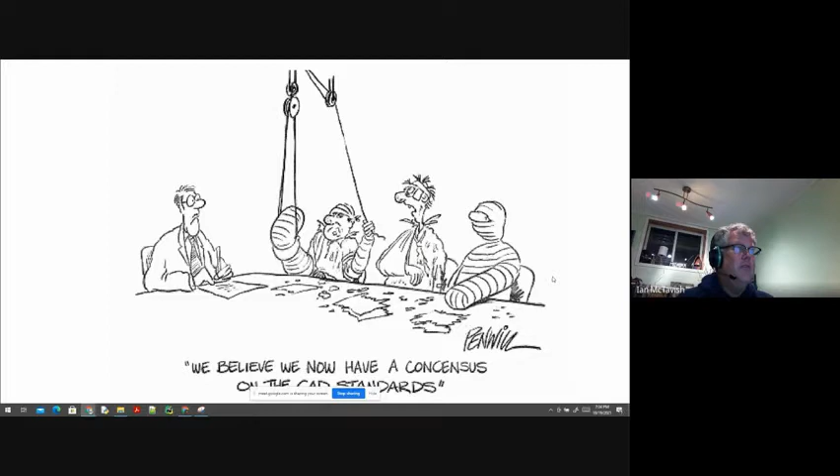And I just saw this joke and I just had to throw it in. We believe we now have a consensus on the CAD standards. Sam and I have had lots of debates over the years about what we should have, what we shouldn't have. And it's always evolving.

Now, drivetrain's the most important thing. Having said that, it's also in some ways the simplest thing. And the reason it's the simplest is because it's so important. I don't want to mess around with it. So, for example, we're trying to raise money to do a swerve robot. We are not going to do swerve in competition until we've built one outside of competition and practiced with it

and tested it. So once January 6th or January 8th comes along and we have our game, if we think swerve would be really great, if we haven't built one before then, we're not doing it. I want to make sure that our drivetrain is reliable. So weighted objective tables are really, really important.

And with the recording, if you go to your Google Calendar later on, this will all be saved there. So you'll be able to access the links and everything in the Google Calendar. So there's the weighted objectives table. I'm not going to read it, but basically you look at what criteria you have. So for me, cost, experience, reliability, maneuverability, and you weight those different things.

So even though swerve, for example, is very maneuverable, it comes at a very high cost. And once we do the calculations at the moment, it's not worth it to us. Now, if we get those swerve modules, if we raise the money to do that, and we build a test robot, well, we can use those same modules. Now the cost drops down. All of a sudden it becomes feasible.

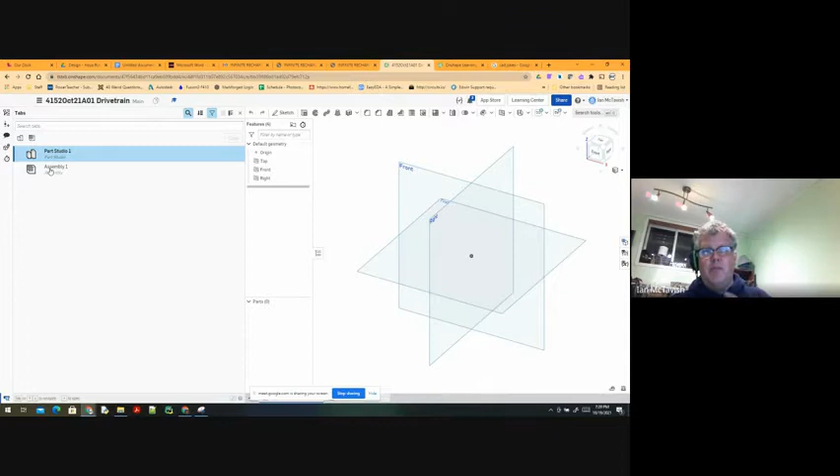And David's got a point. This naming convention can get really complicated. Our robot will have thousands of parts, and having this sequential system is really important for us. The other key thing is separating this into separate documents; we ran into a problem where it would just bog down because there was so much detail.

Separating the documents is new for us this year. Let's say David's working on the drivetrain, Avalon's working on an intake, Sophia is working on a climber, and all the different people are working on different parts. Because they're working in different documents, it's not bogging down the same way. So that's going to be a really key piece.

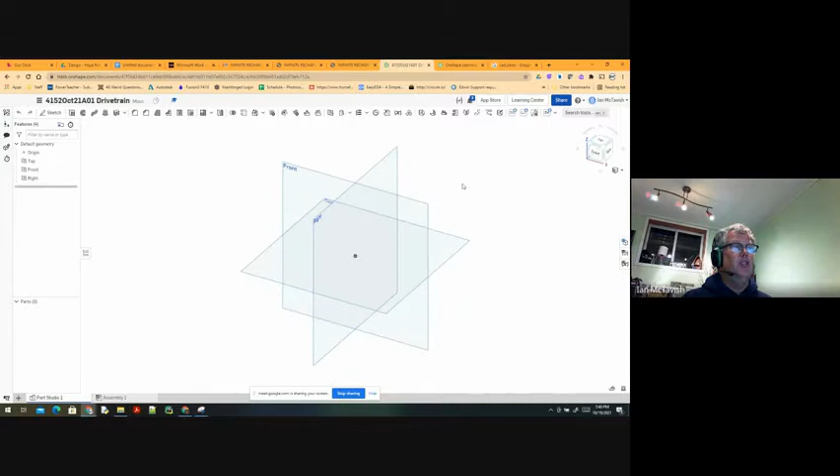The tab manager, I'm going to hide that so I can see my screen. There's my top view. If you're new, this little cube allows you to look at things in 3 dimensions. Your right mouse button rotates your camera, your scroll wheel pans the camera and zooms in and out, and your left selects. So top view, sketch. Whenever you go into a sketch, you type the letter N to normalize it. So here is my view.

I'm going to create a center point rectangle for the drivetrain. I click on the center, and the orange indicates that there's a constraint. This is the coincident constraint; hold your mouse over it and it tells you what it is. They share the same location, so the center of this rectangle is locked on the origin, which is what I want. I click and drag, making sure I'm not getting any orange, click over here, and now hands off the mouse, and I type.

My width was going to be 27, but I'm going to make a change. I'm going to type the number sign. This is new: when I type the number sign, I can create a variable right in here. I'm going to call this robot width and hit enter. Here I'm going to type 27. I'm going to stick to numbers instead of length.

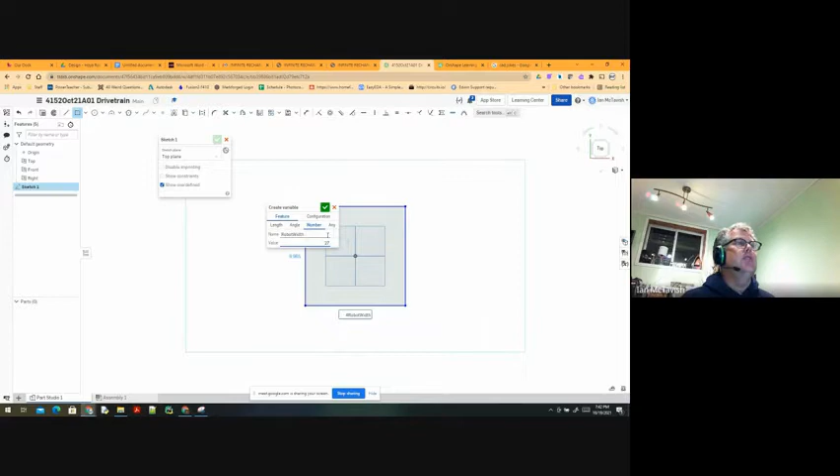The reason is that as I manipulate things, if it's a number, I can do math with it, and if it's a length, I can't. So that's going to be 27. Click the green check mark, click enter. There's 27. Whoops, I don't know what happened there. I'm going to hit escape and click my dimension tool. Click, click, and again, I can create a variable right in here. This is going to be my robot length, and this was 32.

And enter. Now that's the perimeter of my robot. So I'm just going to click the green check mark. I just want to explain a few things.

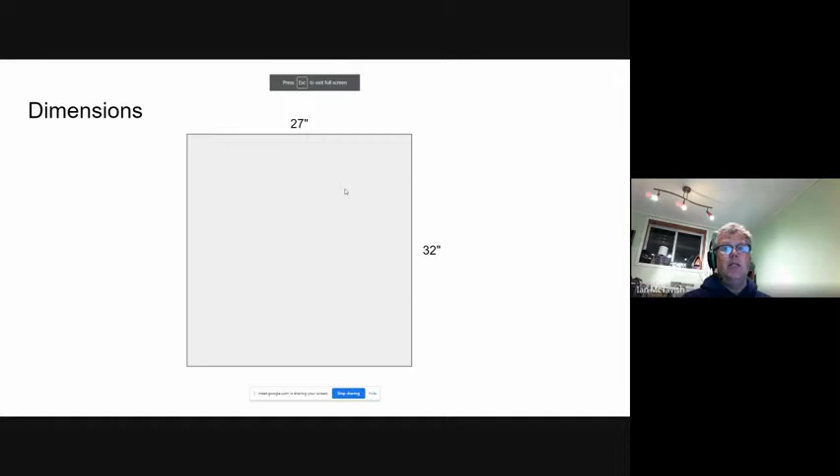The first thing is you can see my variables are right there, and this is a fairly new feature. Those of you that did Techno Girls, we may not have dealt with that back then because it wasn't part of OnShape. It's a really useful feature. I can click in here and type a different number, and everything is automatically adjusted based on the number that I have. So there we go, 27 by 32, that's the perimeter I'm going to use.

Now I'm going to quickly show how we get that. There's a couple key aspects. Aspect number one: read the manual. This is something you're going to hear from me over and over again. This is the link to the FIRST Robotics competition manual, at firstinspires.org.

That is the website for FIRST Robotics, and that is a website we use to find out the rules of the game. It's going to be really important that everybody is able to go to that website, find the manual, and read through it. There's the links for the manual, and there's a bunch of sections, but you can't quite see on that one. So let me just skip over to where I've got the page open.

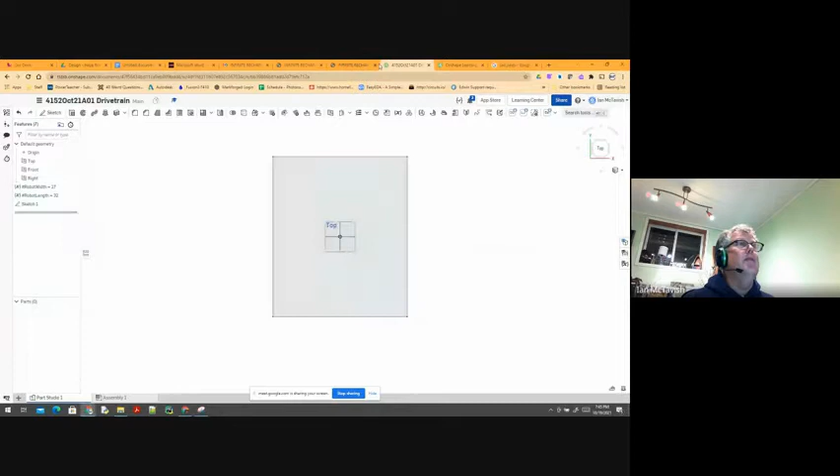Here's the manual, and you can see there's different sections. The section on robot construction is going to be crucial for the design team to know about. In the robot construction section, here's rule R3: your perimeter cannot be greater than 120 inches. So our robot is 27 inches by 32 inches. If you do the math, it's going to be under 120. And it can be no more than 45 inches tall, and we can't extend beyond that.

So those were the rules for Infinite Recharge. The rules will be different each year, but typically what we've found in the past is that the kit of parts drivetrain is basically a 32-inch long side, and that seems to work really well. So we try to stick within that.

Having said that, I've made a 24-inch robot last spring and this fall. If things work well with this, then that might be something we'd look at if there was a game where we had to balance with other robots. Having a smaller robot would be a huge advantage because you could get more robots on.

So there's our sketch. Over here in the feature tree, it's really important - you can see all your different features, and you can double click to go back into the sketch. So I'm in the sketch, and that's my perimeter.

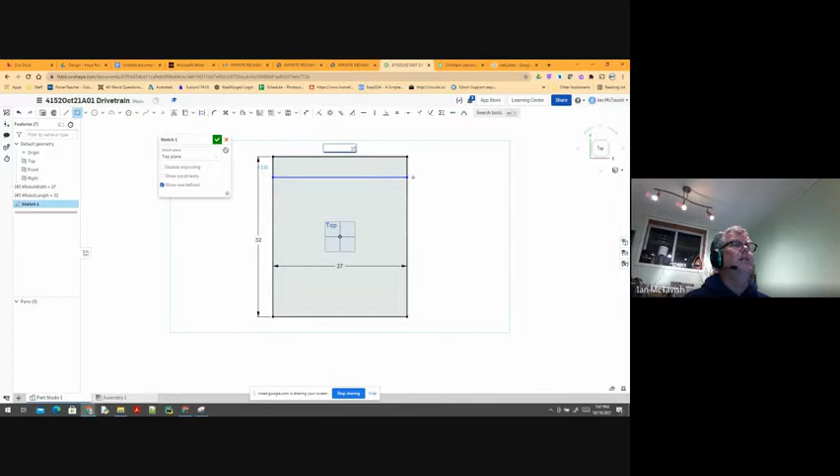Let me show you what I mean by that. If I set that as 27 inches, let me just do it again so you'll see what I mean. That orange indicates that it's going to have to touch that. Well, if I then set the width, this is over constrained, because it's saying this dot has to be touching here and this dot has to be touching here, and you're saying this has to be 27.

They're going, what if you change the width? Then it's not going to be true. And what do I pay attention to? That's why I don't want to set that distance - anything in red is bad. So what I want is the black line. Here's the blue line - it's not constrained. My dimension tool, and you'll notice that when I hold my mouse over a tool, there's the letter D.

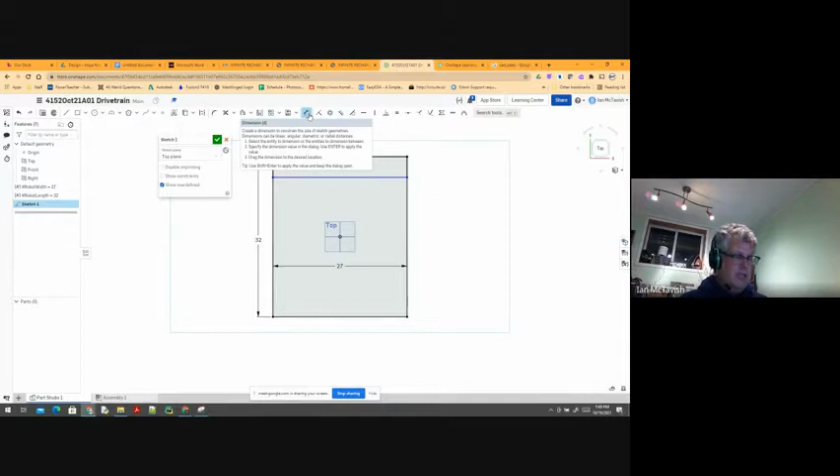Using keyboard shortcuts, the letter D turns the dimension tool on and off. Get comfortable with those because it'll make you faster. So I'm going to click that line and that line with my dimension tool, and I'm going to say this is going to be 1 inch. So we're using 1 inch by 2 inch tubing for this.

That's 1 inch. Then I want to have another one over here, and this is where I'm going to take advantage of the mirror tool. The mirror tool allows me to select this line right here that goes through the origin and select this line, and just like that, I've created another rectangle at the bottom by mirroring it.

And one more rectangle over here. So this is going to be my side rail. You'll notice that I've just put it in a little bit. I am going to make it 1 inch, but I'm going to escape. I don't want to set that height.

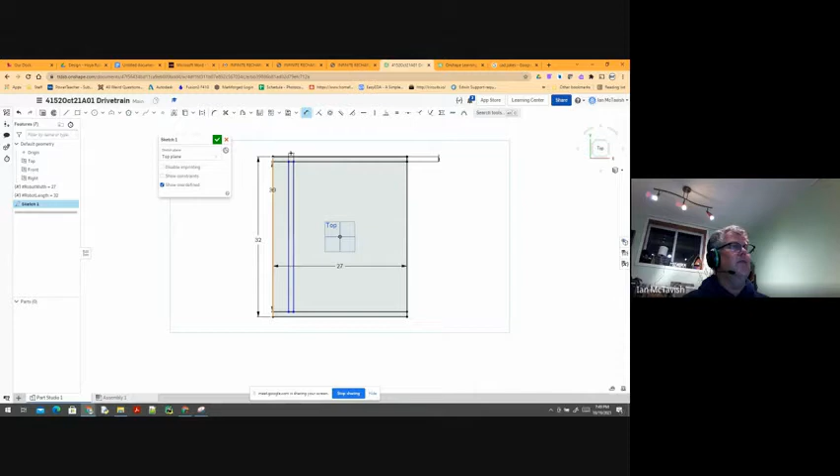Now, this particular one, what I need is my wheel depth, and I'm going to use a variable. So with my dimension tool, I'm going to click this line right here, and click this line right here, and click and type. By typing the number sign, I can create a variable. So what I'm going to call this, it's going to be a number, wheel depth, and it's going to be a value of 4.

Click OK. So the idea with the West Coast drive is my front will actually extend past my wheel, and I'll have my wheel in here on an axle. So that's all good. Again, I want to mirror it. I'm going to click the mirror tool, click that line, and now I can select those lines, and there's my frame perimeter. That's what it's going to look like.

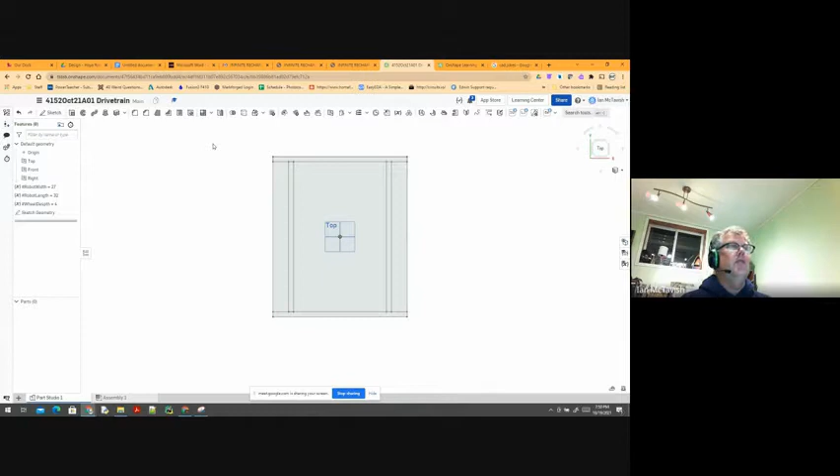So that's my sketch, and I like naming things because we're working as a team. Naming it sketch geometry makes sense for our sketch perimeter. It's a little easier for us to figure out what you're referring to. You'll notice that in here, you can actually add folders and organize the features. Sam does that. It makes it so much easier because we're going to have so much stuff.

Now, let's go back to the slideshow.

Wheels. So with wheels, we need to make some decisions about our wheels, and there's a whole bunch of different options. I am just going to share this link with you. Copy link address. This is a phenomenal resource that NASA and the Robotics Alliance project put together. It's a robotics design guide, and basically they go over everything, like why you would use a 4-inch wheel versus a 6-inch wheel. There's a lot of detail in this, and it's really worthwhile reading.

So there are some advantages and disadvantages. In infinite recharge, for example, there's a bump on the playing field, so the question is, we need to get over that bump. Right off the bat, that kind of eliminated 4-inch wheels for us, because a 4-inch wheel wouldn't get us over that bump. Now, some teams did use a 4-inch wheel, and what they did is they built a ramp so their wheel would slide up, but they had to put their wheels close together so it wouldn't get caught on the thing. So there's ways around it, but immediately a 6-inch wheel worked for us, so that's what we went with.

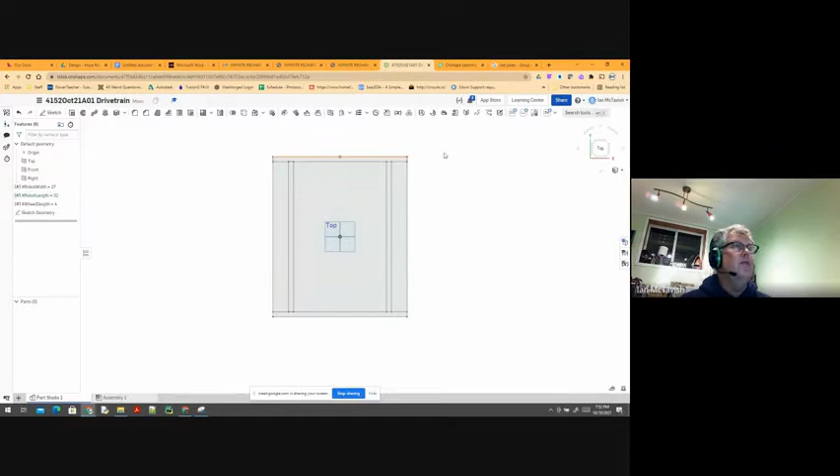So let's turn this into an actual shape. Over here, you can add custom features. If you can't find the custom features option, if you're looking on a smaller screen, the search tools is always at the end, and you can just type custom and there's add custom features.

So when you add custom features, these are some of the things that they're called feature scripts. The idea is that somebody has programmed a whole sequence of steps. Some of this stuff would take a long time, but by using this program, we can do it really quickly. So the one that I'm going to use is called Extrude Individual. So what you do is you just type Extrude Individual.

I'm going to copy that and put that in the chat, so if spelling is not your strong suit, there it is. When you hold your mouse over it, if there's a bunch of different ones, this is the one from Julia's feature script. So that's great.

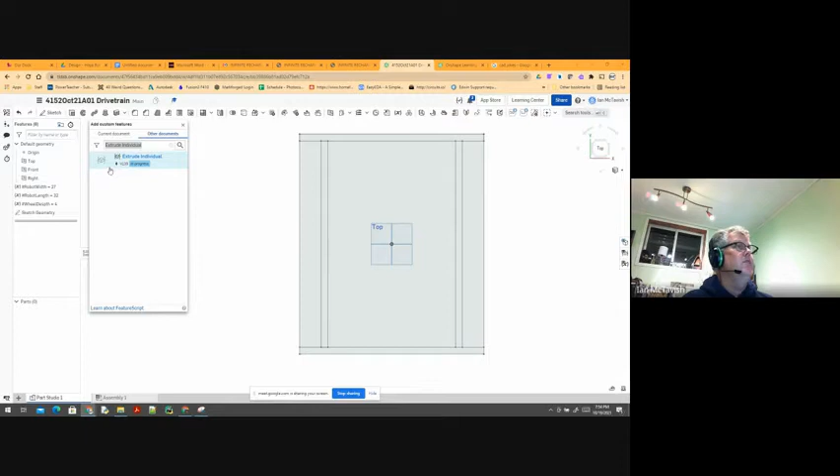That's what we're going to use. You would click on it. Now I'm not, because I've already got it. So these are all the custom features that I've added to my OnShape. There's Extrude Individual. I'm going to click on that right now. And what I can do is I can click on each of these rectangles.

And I'm going to set my depth to 2 inches. Extrude Individual, I call them rails, and green check mark.

And just like that, I have 4 different parts. You can see I can hide each of the individual parts down here, and I actually have some rectangles now. So that's kind of cool. Now, what I'm going to do is I'm just going to turn to the right.

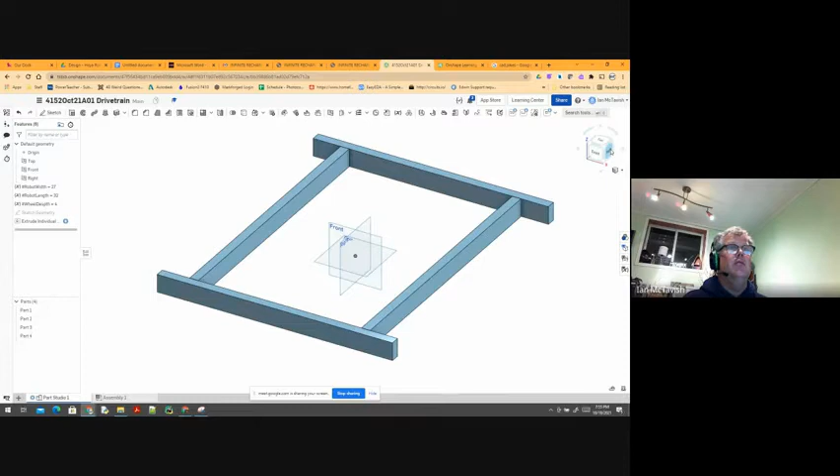And what I'm going to do is I'm going to click on the right plane and I'm going to create a sketch. And what we're going to do is we're going to set where the wheels go.

So the first thing is we're going to create a circle here, and we're going to create a construction circle. This is just going to show us where the wheels are, and I'll explain what we're doing in a moment. So I've got my circle tool, my construction tool, and now I'm going to hold my mouse over the origin, and you'll notice there's a little orange dotted line that indicates this is vertical to the origin. So that's great.

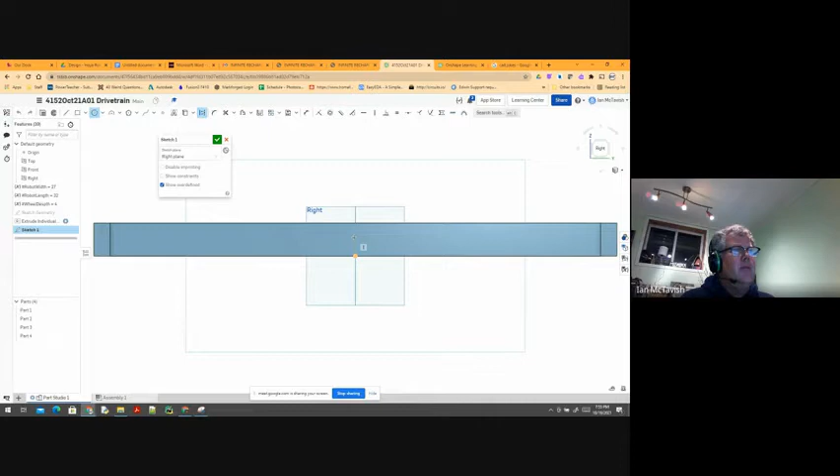I'm just going to click somewhere and click and type the number 4. So there is my 4-inch wheel. Now,

what we want is we want a drop center. And a drop center means that this is a 2-inch.

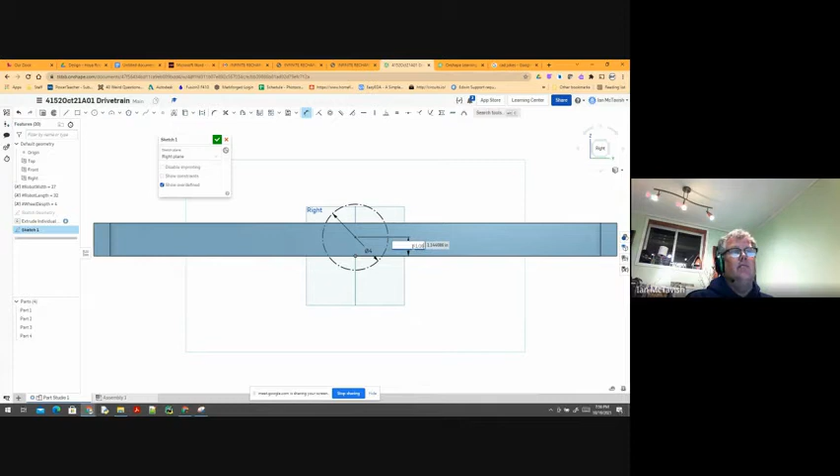So what we're going to do is we're going to click the dimension tool, click the center of the circle and the origin, and over here we are going to click. So half of 2 inches is 1. And what we're going to do is say this is going to be 1 minus 1/16. So the center is just 1/16 lower than the middle. And the reason for that is we are going to use a 1/8 inch drop center.

And the reason we're doing the drop center is as our robot is driving along, if all 3 wheels are touching the ground, that's a lot of friction when I'm trying to turn. So by having the middle wheel just a little bit lower, 1/8 of an inch, then basically only 2 pairs of wheels will be touching the ground when I turn, and that reduces my friction. So it makes it easier to turn. And so there's my drop center.

And what I'm going to do is I'm going to create another circle here for the front. I'm just going to click somewhere over here, and you'll notice I'm clicking way up here, and I'm going to explain why. And I'm not going to set the

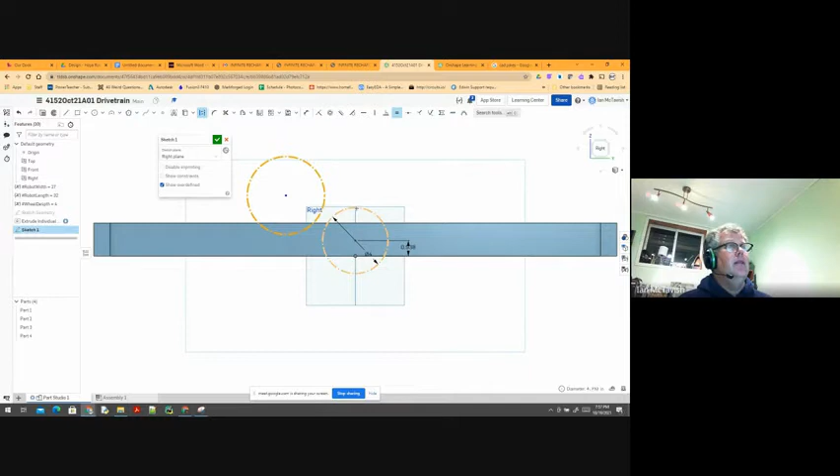diameter. What I'm going to use is my equals constraint, and the letter E allows you to do the equals constraint. I'm going to click the two circles, and now they are equal in size. So if I decide, oh, 4 inches, we did some testing, that's not going to work, I'm going to use 6 inches, then I only need to change one value for the 6. And I could make that a variable. There's lots of ways that I can do this.

Now, the reason that I'm doing this is because I need to set 2 dimensions for this. So the first dimension, I'm going to click my dimension tool, and click the center of one circle and the center of the other. You'll notice where I hold my mouse will determine the dimension type: right now that's horizontal, that's center to center angle, and that is vertical.

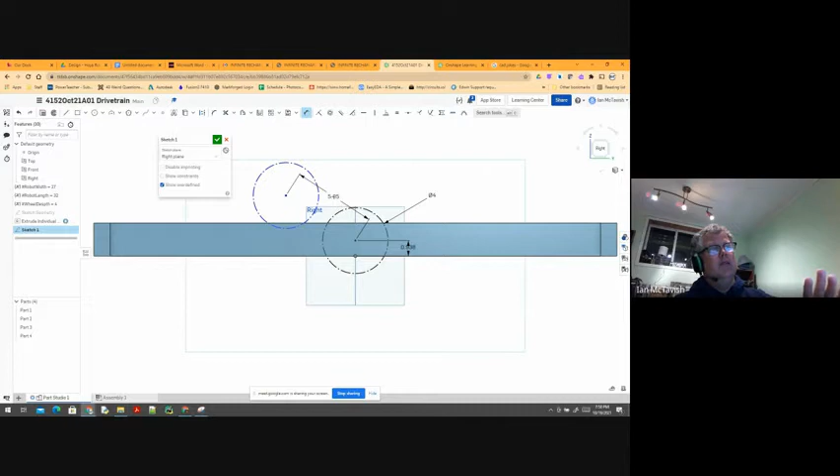So I want the angle. And this is why I made it up here, because it's easier to get the angle measurement. When I've got my angle measurement, I'm going to click and create a new variable. So number sign, new variable. This variable is going to be a number, and it's going to be called C to C. That's short for center to center.

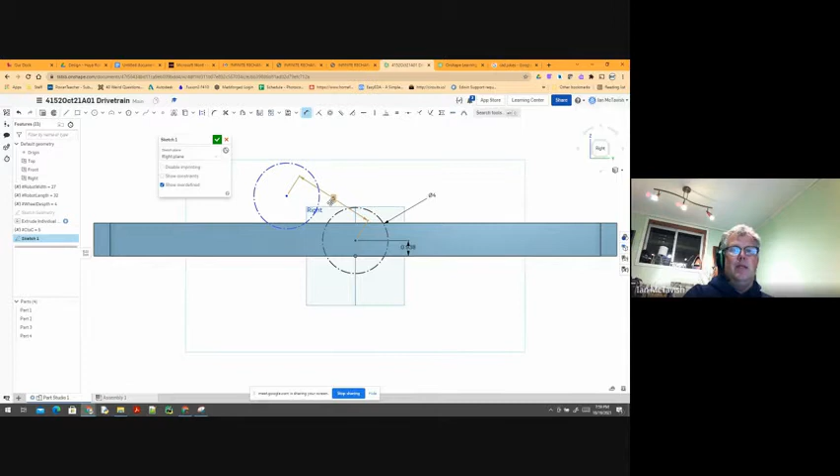Right now, I'm just going to set this to 5. It can be anything you want. And check mark. There we go. The reason we're doing this is because I'm going to have my wheels, and I need a belt to connect the pulleys that are turning these wheels. And the center to center needs to be a really exact number, so I want it as a variable so I can set it.

Okay, so the next dimension that I need, again, I click the 2 centers, but this time I'm going for the vertical. And for the vertical, this is 1/8 of an inch. So now you can see this center is just a little bit higher than this center. That's why I do it that way, because it makes it much easier to get that diagonal first. Okay, so I've got this value. Now my center to center right now is 5.

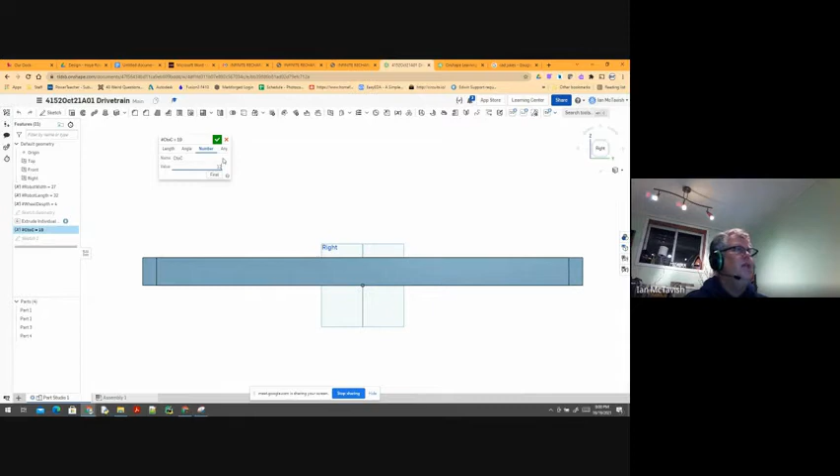Let's try 10 inches. What I'm looking at is where does this wheel go? So right now, 10 inches seems to be, okay, 12 inches is pretty close to the edge. So perfect, that's what I'm aiming for. And the reason I need to know that is I need to make some decisions. So back to the slideshow.

Here's my decisions. I need belts and pulleys. Basically, we have a couple of options. With the kit of parts, we get 42 teeth pulleys, so I have a ton of 42 teeth pulleys. That is an option because we already have them. The second option is Sam has done a West Coast drive, which is phenomenal. This is what this is based on. And basically, he's designed his own 30 teeth pulleys, which work really well.

And there's Sam. Go for it, Sam. I can't hear you, Sam. Hello. There we go.

So the biggest thing I'll mention about the pulley I designed, I do not know how the hub of it will hold up to FRC robots because it's 3D printed. I just want a disclaimer that it might not hold up. There are ways to remedy that, but that requires us to either buy something or make something to solve it. So this is why we've built one of these right now, and we're going to drive the heck out of it and see how well it holds up. If it holds up well, great, we're going to use that. And if it doesn't, then we stick to the 42 teeth.

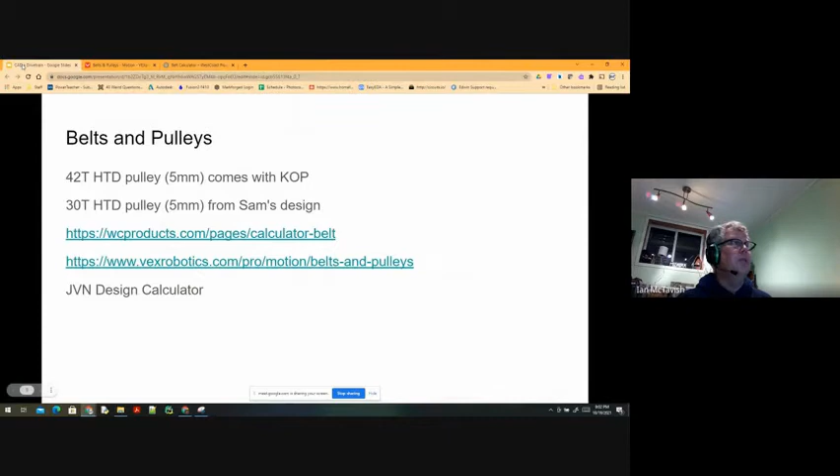There's a couple things. The first thing is, I mentioned in the slideshow that we're dealing with an HTD pulley. An HTD pulley has a pitch of 5 millimeters. When you have a pulley, you have teeth, and the pitch determines how far apart the teeth are. And David, bang on. This is really crucial stuff. We stick with inches because so many of our items are inches, but you'll see when we buy belts and pulleys, they're in millimeters. And that's okay.

So in here, pulley number one, let's say we're doing the 42 teeth and the other 42 teeth, and we could obviously use the 30 tooth instead. Here we can set our desired center. When we looked at our design, we decided a center to center of 12 inches seems to work. So we're going to say we want 12 inches. And down here, this tells you the belts that are close to 12 inches based on those pulleys.

All it is is math. It's circles. It's really neat math calculations, but they've done the legwork for us. So there's our center to center distance. So what we'll do is we will type that in, and it is a desired belt of 160.

So the first thing is, talk to me. At some point, I'll share with you the inventory that we have. We've got a whole bunch of belts. I've inventoried them. So the first thing is to look at, do we already have something so it'll make it quick and easy to use? And if not, then how much does it cost to buy? So if we can make decisions based on stuff we already have, it makes it a lot easier. I do like using new belts for competition because they're not worn down. It's just a lot easier.

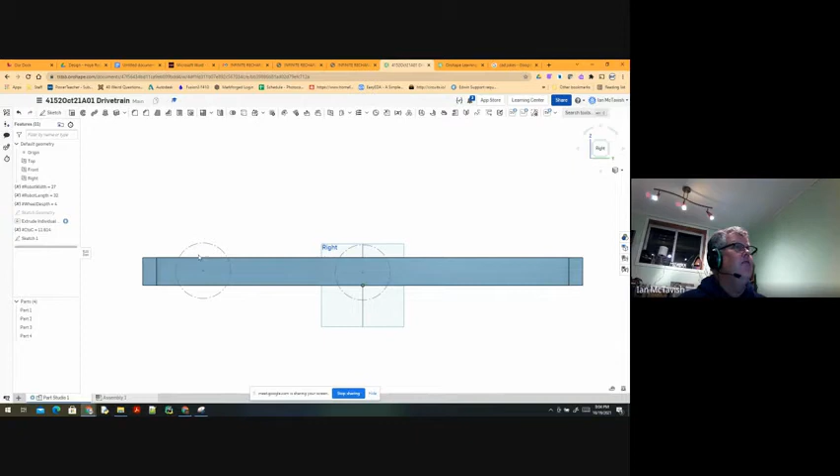So there we go. Our center to center and our wheel is automatically set up. So that's great. And I think you'll notice that there's the desired belt. We'll be getting to that in a moment. So we'll just keep that open. And what we're going to do now is go back into this sketch. So that was called sketch 1. And what I'm going to do is call it sketch bearing holes. There we go.

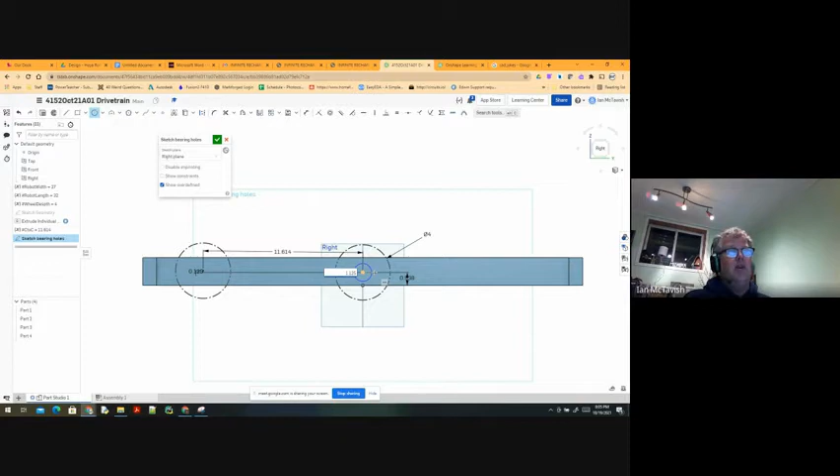And what I'm going to do now is I'm going to create a circle. And this time I'm going to create a circle based on the center. And 1.125 is the size of our bearings. But what I want you to do is do the plus and new variable. And we're going to call this variable offset. Every single sketch that we have, when you're doing holes for bearings, I want offsets included in them. And the offset for this, we're actually going to leave at 0 for now.

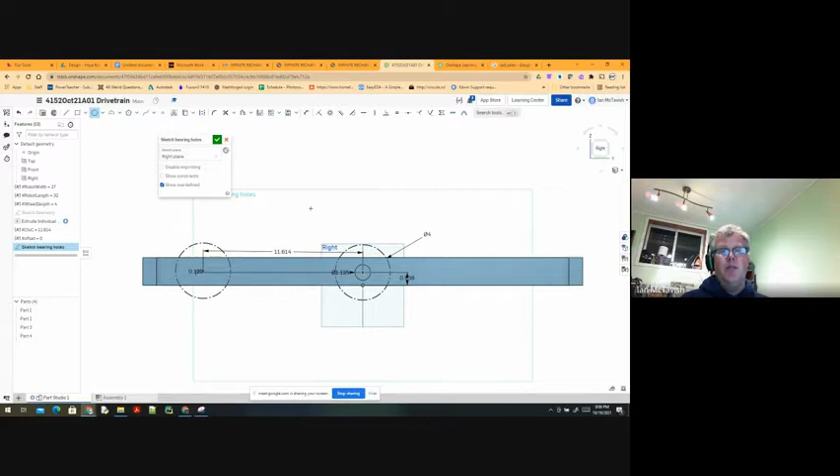But this allows me, when we're doing something on the CNC machine, we can set the offsets. We can do a test cut and go, okay, we need an offset of this so that it fits perfectly. That gives us that flexibility. So same thing over here. You'll notice I'm zooming in, so I'm getting the center. And I'm not setting the value. I'm using the equal sign to set equal to the bearing hole. And again, I'm going to use my mirror tool to mirror that. So there's my 3 circles. There's my bearings, sketch my bearing holes.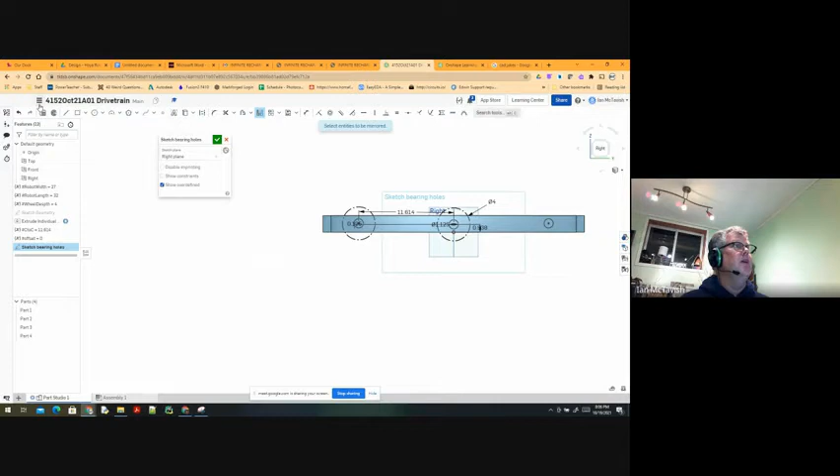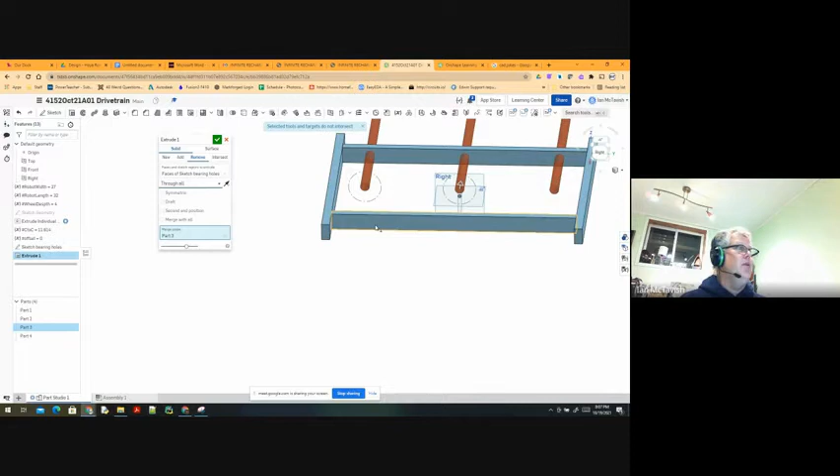And what I really want to focus on, how do we save time? So I don't even need to save the sketch. I can go right into Extrude. And with the Extrude, I'm going to remove, and I'm going to remove through all. So that's going to remove through all, and you'll see it's merging with this part. Well, I got to select. That's not the part. I'm just going to click that. There we go. So it's merging and it's going through there. And I also want to go symmetric, so it's merging through both pieces. And that's my extrude, my bearing holes. There we go. So now I have my bearing holes.

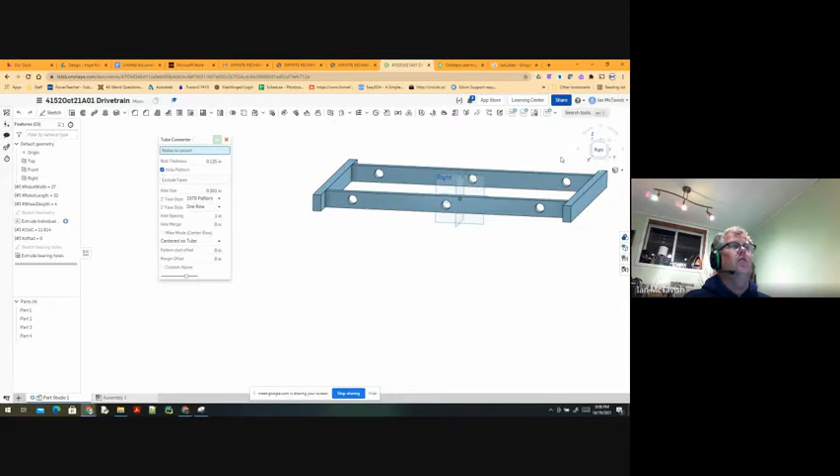And what I'm going to do now is I'm going to turn this into tubing. So there's another feature script. So again, custom feature, remember. So there's my custom features. And this one is called tube converter. And I'm just going to type that in there. And again, Julia's feature script. She's got a whole bunch of these. So you click it. If you watch what I'm doing, I'm just going to do it really quickly. So tube converter. And I'm going to select all 4 parts. And whoops. It takes a few moments to do it. So just be patient. And I've got my wall thickness, 1/8 of an inch.

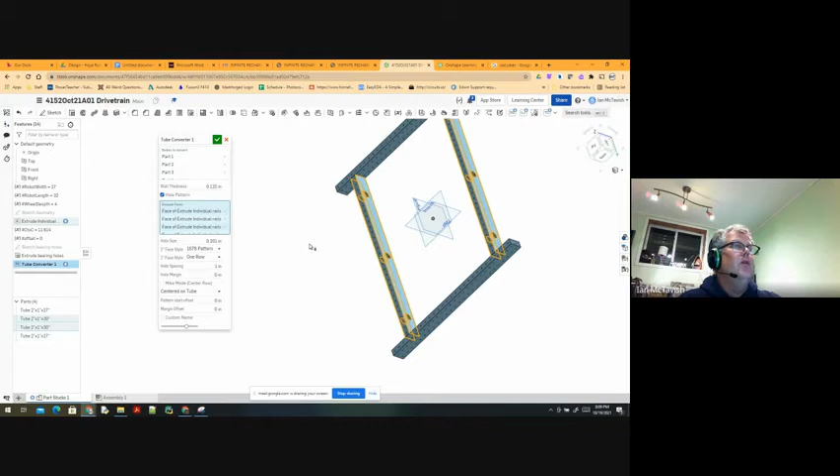That's great. I am going to exclude these faces. And I'm going to right click and just get that face too, and that face. And the reason I'm excluding those faces is we don't tend to put holes on that. As we're doing the design, we can debate that. It might be really worthwhile in terms of mounting the bumpers and stuff like that. But just for today's demonstration, I'm not worrying about it. And there we go. I've got my tube, and you can see my parts are listed, and I like how they've set up the names. The names make a lot of sense. That's just great.

So one other feature that I'm going to do, you'll see I'm selecting all of them. And by selecting all of them, I can go right in and just right click.

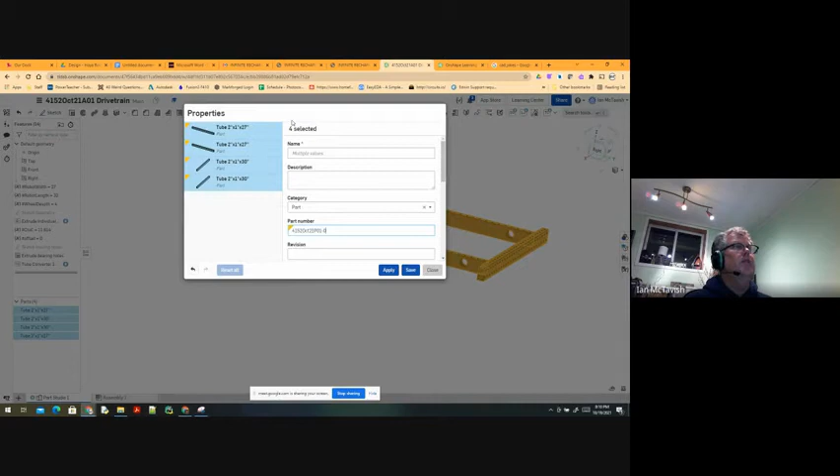And I can go into my properties, and I'm going to set my part number, 4152OCT21. Now, key, because this is going to be a part, 01, and then I'm going to number each of them. So what I can do now is I can click on just the first one and set it as number 1, click the second one, number 2, third one, number 3. And just like that, I've got unique part numbers for all of my parts.

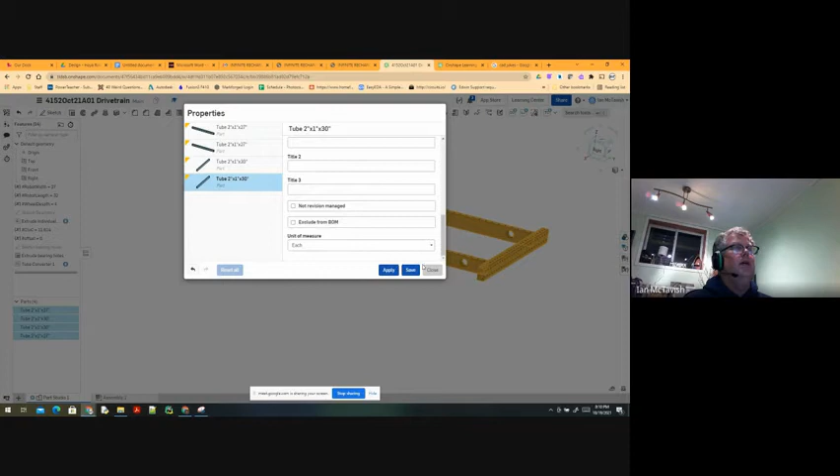I've got, if I need to buy them from somewhere, I can put that in right off the bat. We buy our aluminum tube from Reynolds. And I can apply that and save that, and I'm good to go. So I've got my part numbers. I'm good. Now, we've got that designed. Might as well design our L brackets while we're at it.

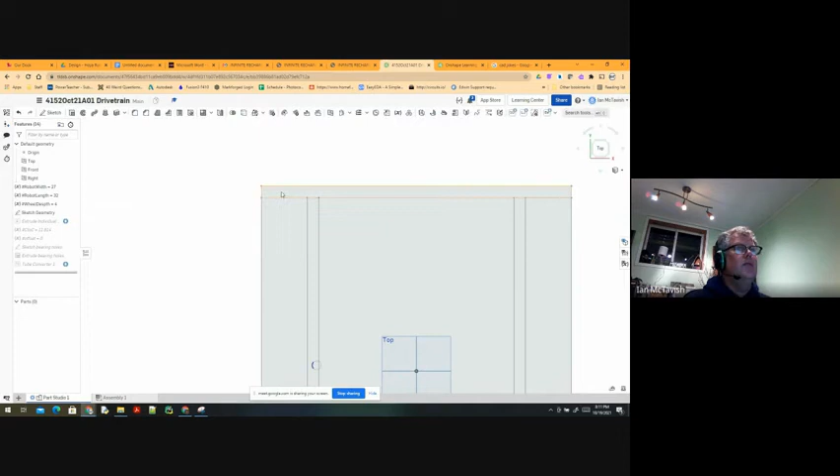And what was my wheel depth? This should be lined up. I'm not sure why that's not lined up. Give me 1 second. Go back into sketch geometry. That's because this distance I never set. I wanted it to be wheel depth. Don't know what happened there. It's just got to regenerate everything, which will take a second. There we go. So everything's lined up. That's perfect.

Now, actually, no, I'm not going to design those. Just give me 1 second. Okay, so we have this. We have our basic drivetrain. I'm going to go over to assembly 1 now. And I'm just going to insert. And I can insert the whole part studio. Green check mark. And I'm going to right click and make sure I fix.

And to be honest, for these particular ones, I'm just going to fix all of them, just lock them in place. My goal with this is to get things done really fast, because we want to start manufacturing as quickly as we can. So if we can design it in the exact location, then we can just fix it in place and we don't have to mess with it. We do want to do mates later on and stuff, so that's going to be handy.

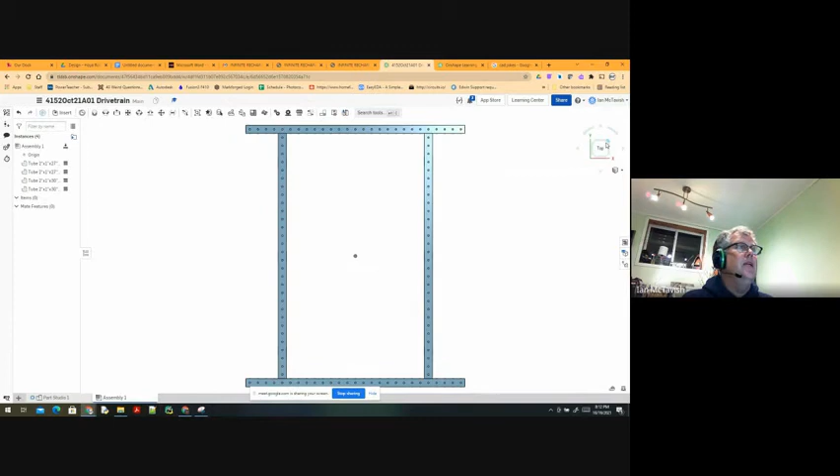Okay, now, the reason I wanted to go into the assembly is with the assembly, I have this button, which might be new for some of you, which is called Create Part Studio in Context. And this is really, really handy. So what I'm going to do is I'm going to click that and I'm going to select the origin. And I have yet to come across a reason why I would select another point. I know that there is a rationale, but I haven't needed it. So green check mark, so we just select the origin.

And what this does is this creates a new part studio, but we can see this. So it makes it really easy for us to design based on where things are. So I'm gonna just zoom in here. I'm gonna click on that face and I'm gonna click sketch. And this is where it's a little tricky. So watch what I'm doing. I'm gonna right click this line and select other. And this allows me to choose what I'm selecting. So I'm going to select the edge and I'm going to select use. So the letter U allows me to quickly select that.

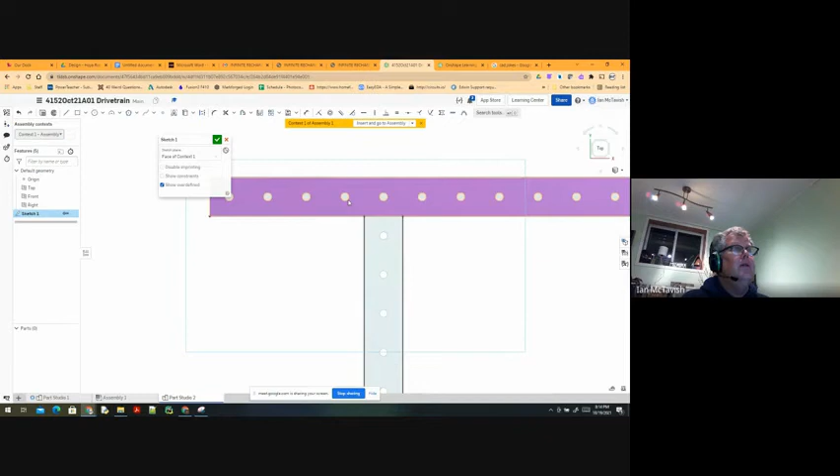So I'm going to do the same thing, edge of context. Now this one, because it's not the context, it's easy for me to select. So I'm just going to select them and use. And what I've got now is I've got these lines and I'm gonna add my circles, and this is where again it's a little tricky. So the select other, selecting the edge allows me to select the edge. So it's a little finicky with that, and you just need to remember that it's a right click to be able to select other, so that you can pick which thing you're selecting. These, because it's not purple like that, then it's not a problem. The purple indicates that's the face that I'm using to make all my calculations from.

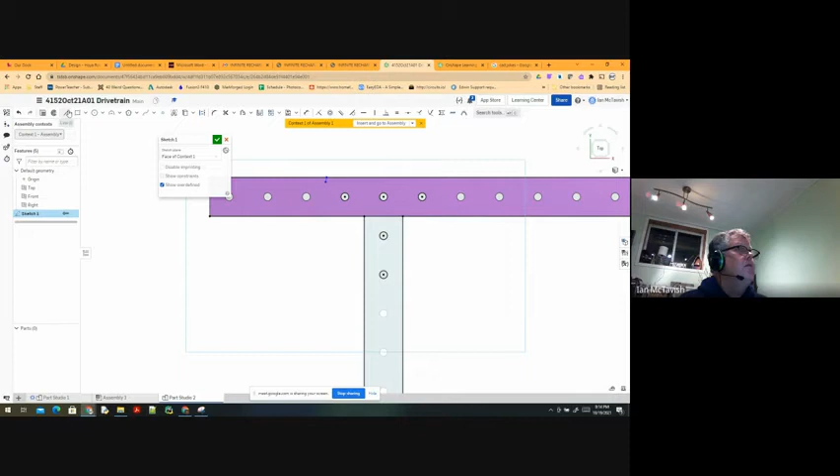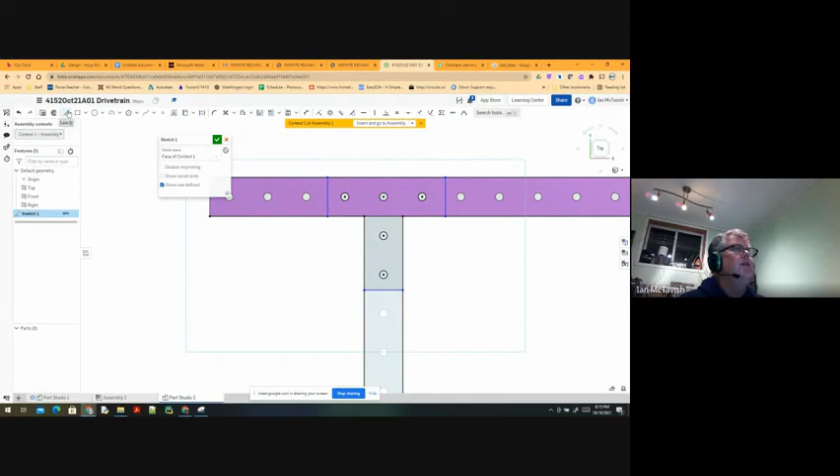Okay, so there's my 3 dots. There's my stuff. I've got a line here, so I'm just going to create, whoops, Control Z. I'm gonna create a vertical line right there. L turns my line tool on and off, so I can quickly create a T bracket. There we go. So there's my T bracket. I just need to set my distance. So that's going to be 1/2 inch from there. That's going to be 1/2 inch from there. Oops.

And that is going to be 1/2 inch from there. And Sam's got a lot of really good techniques with this stuff. So if he shows you something and it's different than mine, there's more than one way to do stuff. So take advantage of those ways. Okay, so there's my sketch, T-gusset.

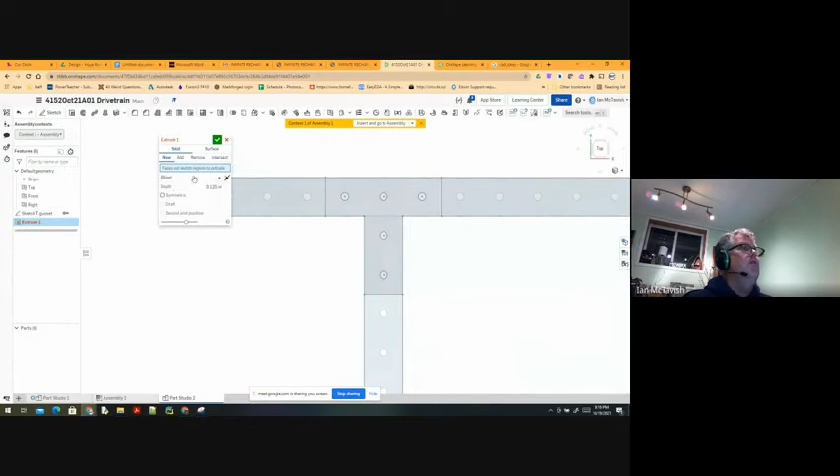Okay. And now that I've got my sketch, I can extrude it, and basically it's going to be 1/8 of an inch. I like right clicking to make sure I'm going in the right direction. That looks good. Now the biggest thing is that I'm going to use the Fillet Tool, and I'm going to set my radius 1/8 of an inch, which is 0.125.

And the reason is that we would cut this out with the 1/4 inch bit. So it will fit nicely in there and just make it easier to manufacture it. So there we go. There's my T-gusset. You'll notice that I'm doing these corners. It's a piece of flat aluminum that this is going to be made out of.

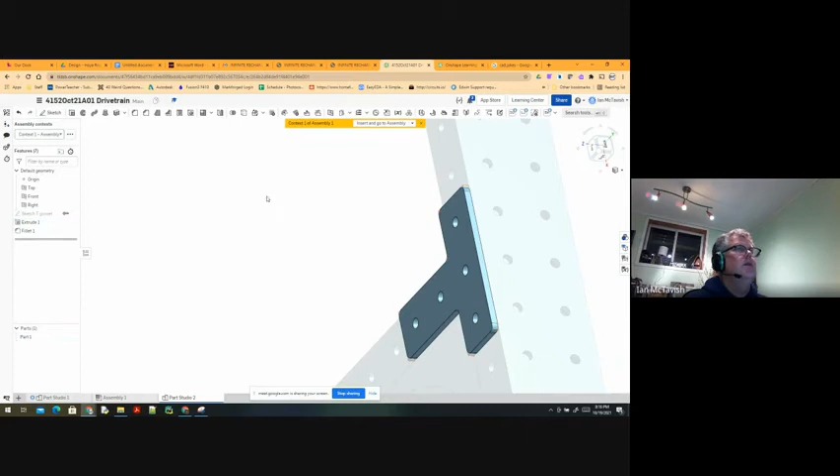And I'm not doing the top. I'm not going to round it over like that. I'm just going to get those corners for cutting it. So there's that. I've got my part. I would name it. I'm going to try to speed up. So I'm just going to insert and go to assembly. And there's the part.

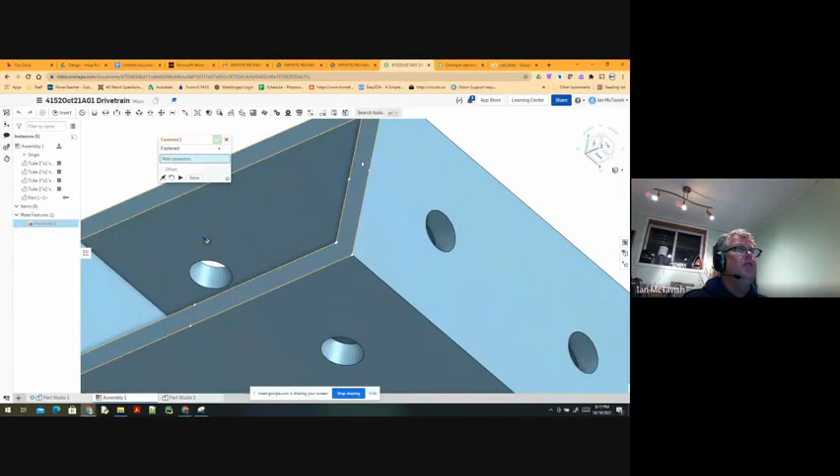What I am going to do is I'm going to add a Fasten Mate. I'm just going to try something. I'm just going to try to fasten it to that. And I'm going to select the center of that. And that kind of works. And then I can just offset it from the edge. 4 inches was too much. 3 inches is what I need.

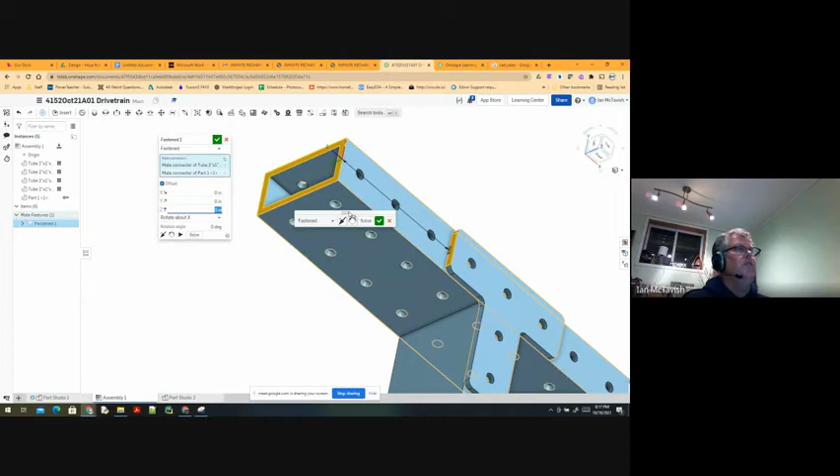And the reason I'm doing that is that way, if we change our distance, change our holes, then it's not going to be offset. It's going to be set based on that distance. So that's going to be a key thing. Now, I'm going to just try something. I don't know if this is going to work. Let me just try this. Yeah, it's not going to work.

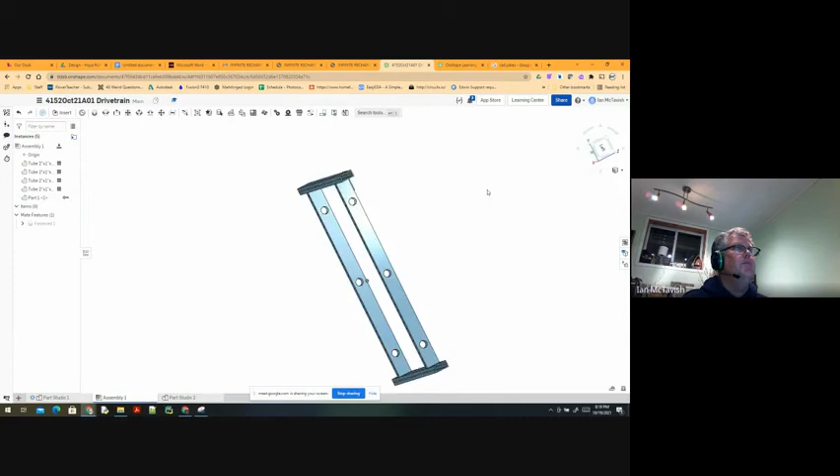Anyways, I've got that particular part. I would obviously add a gusset to each corner, but I'm looking at the time and I got to speed up a little bit. So I'm not going to bother. What I do want to show you is that when you have the gusset, we have a 2-inch tube, we have an 1/8 inch gusset, and we would have another 1/8 inch gusset there. So that's 2 1/4 inches. So if I'm going to use a bolt to secure this, it's got to be 2 1/2 inches, so that we've got some room.

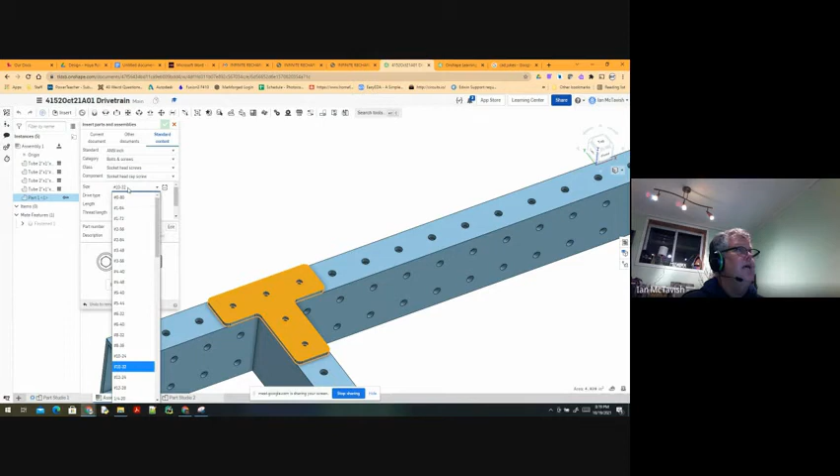So I'm going to click the face of this and click insert and standard content. This is ANSI. It is bolts and screws, and we use the socket head cap screw, and we try to stick to 10-32, 2 1/2 inches, and insert. So I want you to always stick to 10-32 and in 1/2 inch increments, and there better be a good reason to do something else.

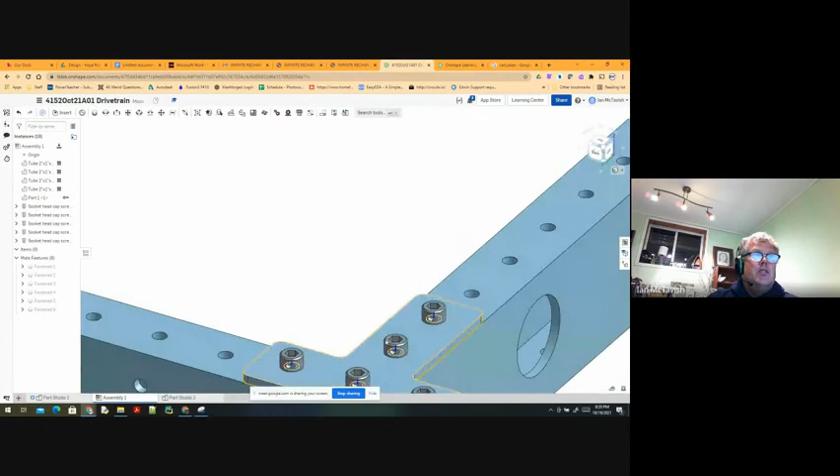And there can be. So our intake, for example, we needed to make sure that the bolt heads weren't sticking up. So we did a V1 and we'd used Lexan. And so we countersunk them so that they were nice and smooth. So there is reason to do it. But the key thing is, 2 1/2 inch, I've got them in stock, so we can just grab them and start making. If we're doing something special, I need to order them, and that takes time. And so we want to reduce time as much as possible.

Now, on these corners, I want to show you, we use something called ThriftyBot. And ThriftyBot has a whole bunch of different items, but the items that I have bought are these bearing blocks. And so these bearing blocks are right there, and you can see they have a CAD model available.

So you can download the ThriftyBot CAD model, and then in here we can insert. And whoops, I need to import it first. So down here, plus at the bottom, I'm going to import. And there's the CAD model.

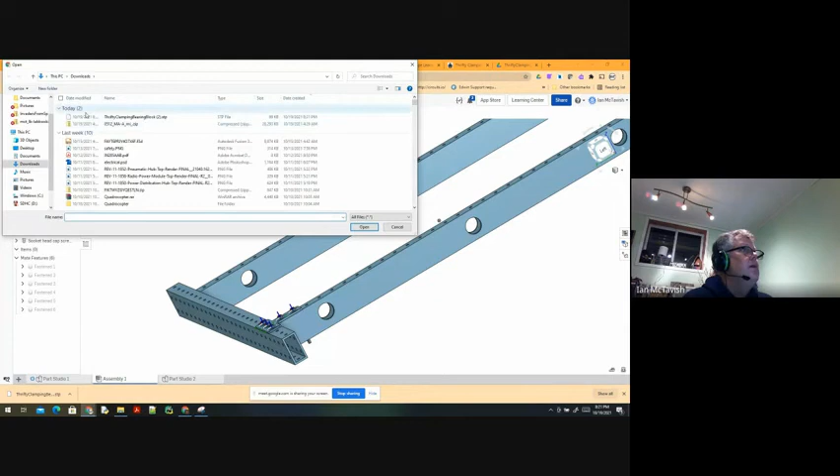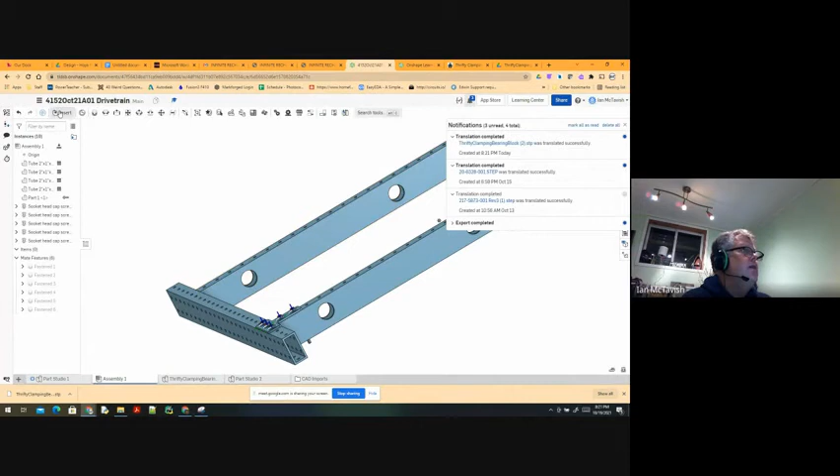So I'm going through this really fast, I know. Those of you that have done this before, you shouldn't have too much trouble, but you might be rusty. You might need a little practice. So there we go. It's imported, and now I can insert it into my thing. And there's not an assembly, unfortunately. So there's my bearing block.

Now, with the bearing block, these are pretty cool. If you look at the diagram, you can see that the center, one side has a greater distance than the other. So we have the drop centers. So the shorter distance has got to be for the center wheel, and the longer distance. So this side looks to be the shorter distance. So what I'm going to do is I'm just going to fasten this.

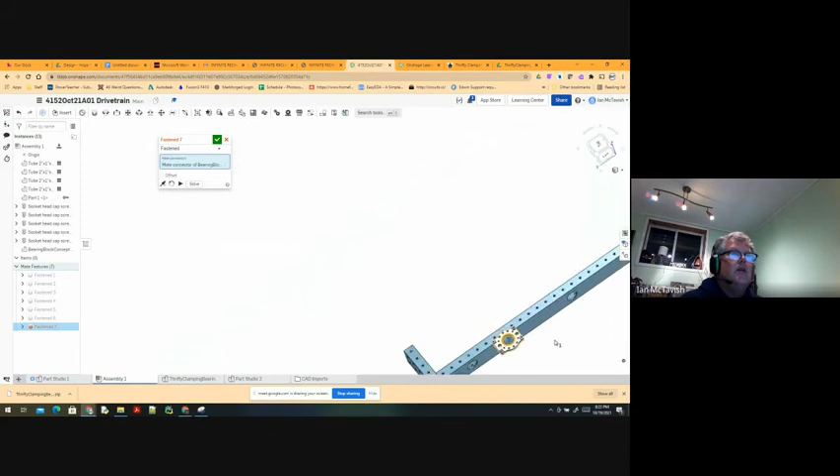And fasten that center. And I'm going to fasten it to that center. And if it's like this, I can flip it around and rotate it. Let's just have a look at that. That looks to be the way it is. So you can play around with it and get it, but basically the idea is that will go in the center and stuff.

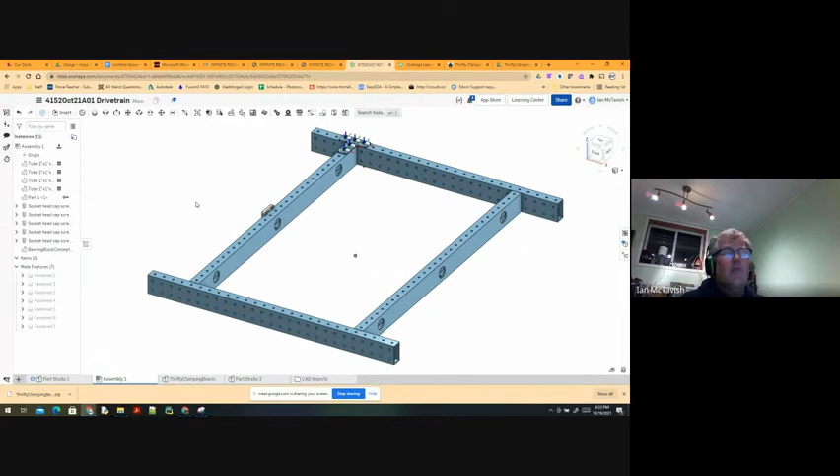And I'm good to go. Now with the bearing blocks, I also need to add a gearbox, and what I'm going to do is in the insert, go for it, Sam. Are you planning to mention, just regarding clamping bearing blocks, are you going to mention the tensioner cams? Not at this point, but we'll chat about that in a few moments. Yeah. Okay.

With the bearing blocks, what I need is a gearbox and MKCad. So, sorry, you might have missed that. Under insert, other documents, you'll notice that MKCad is there. You can also search for the public. We have the enterprise version of Onshape, so I've loaded MKCad onto our system so that we have a copy of it. And I just find that really, really useful.

And you'll see in MKCad, there's a whole bunch of different things. And one of them, for example, is gearboxes. And there's gears. So there's gearboxes. And when you check the gearboxes, you can pick the assembly. And these are gearboxes that Vex Robotics sells, and Rev Robotics and AndyMark.

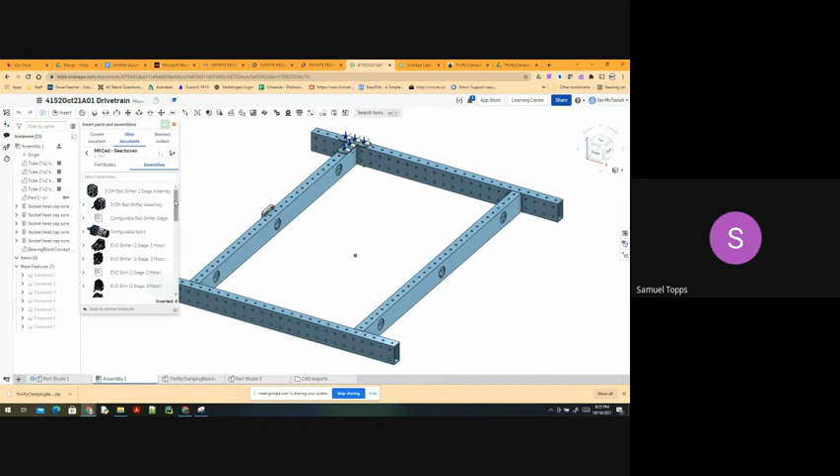Sam, off the top of your head, what was our shifting gearbox last year? Should be a Vex. Scroll up slowly. I might be able to see it. It's not an EVO. 3-CIM ball shifter. That's it, eh? Mm-hmm. Okay. So this is what we bought last year.

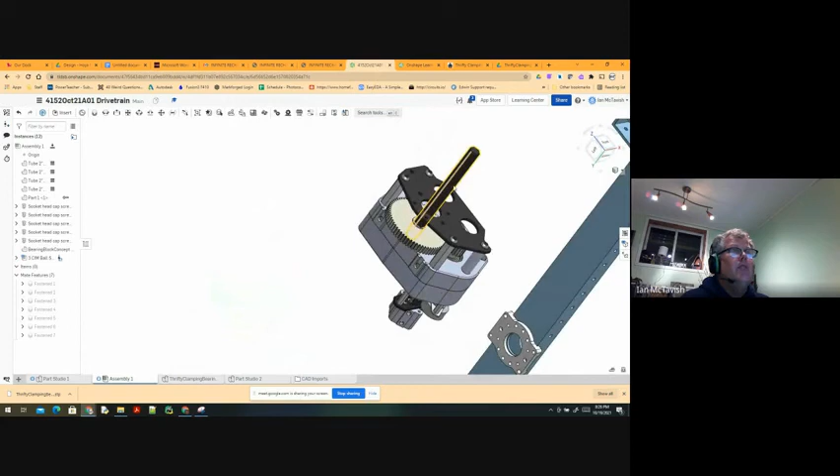So I'm just going to click the assembly, and it's a fairly complex thing, so it's going to take a few moments. With the assemblies, you can see you can change the configurations and stuff. So we can do all of that stuff. So there's the gearbox. And the basic idea is that here is the gearbox, and we need to mount that. You can see here's your output shaft. So this output shaft is what needs to get mounted through that circle.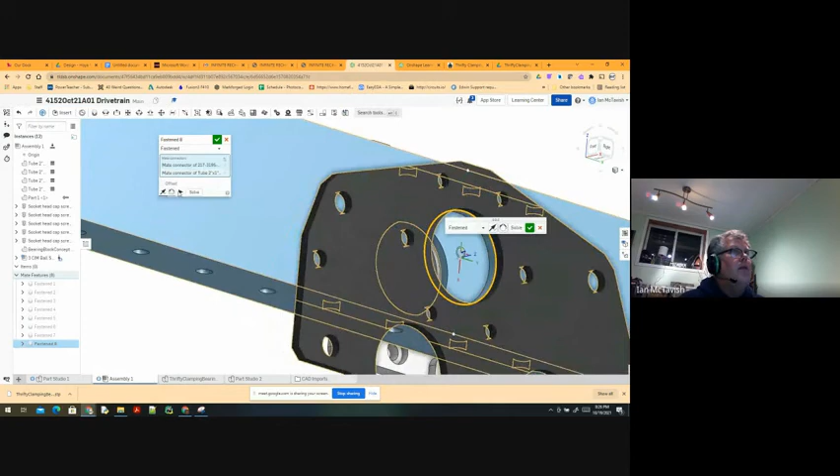So I'm really simplifying this. You want to actually spend some time doing it, but to get through the time, I'm greatly speeding things up. So again, I'm going to offset it. I think I need to flip it around. And there we go. So I've got it mounted. And then the beauty is that these are your mounting holes, right?

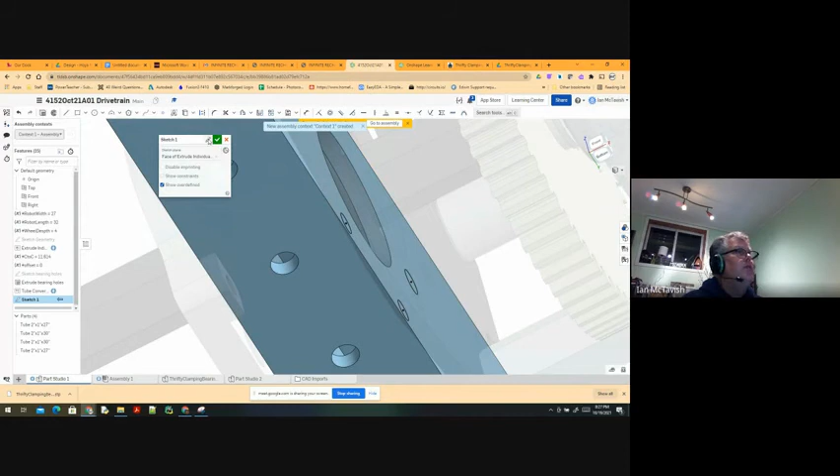So now I can right click this part and I can edit in context. And I can select that. I'm going to do a sketch, and I'm going to select that hole and that hole and that hole, and rotate my view, get that hole, use them. And these are my gearbox mounting holes. And I'm going to extrude, and I'm going to remove through all. And just like that, my holes are there, done.

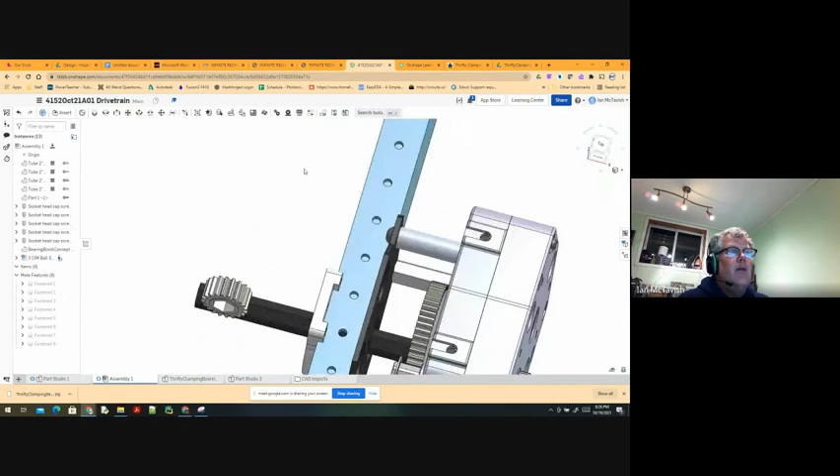You'll probably want to switch that to symmetric in the future too, so that you get them on both sides of the drivetrain. Yeah, exactly. So that's how I can do it. And that's in my assembly.

Obviously in this assembly, not everything was mated because I've got this gear floating around now, and this kind of thing can be a real pain. So when you see something floating around, figure out where it goes and get it mated in there so that it's not floating around. Now, with this, there's my bill of materials.

And you can see what I'm going to do is I'm going to do structured. So instead of having every single component of the gearbox, I just have there's the gearbox. But I can quickly see these are the names, and I can click on something. Oh, that's my T-gusset. So I can change the name right here. And I can make sure that all my numbers are sequential.

So this is a part number from Thrifty. I'm going to look it up, and there's the part number from them. This is a really key thing. I can't manipulate the McMaster CAD one, but it's grayed, so it indicates to me this is something I buy. This is not one of these, so it tells me this is something that I buy.

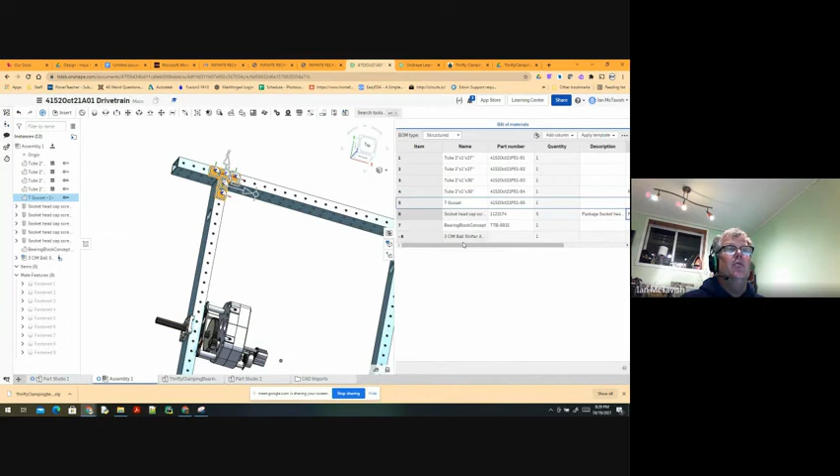You can see the socket head cap screw I've gone through and set from Fastenal, that's the particular thing. So it makes it easier when we're exporting this to make my shopping list and our manufacturing list. We have all the details that we need, and we've got everything.

Now I'm going to switch back to my slideshow. Oh, the other thing is the JVN design calculator, and this is really a crucial thing. If you just do a search JVN design calculator, you'll find there's lots of links to it.

There's the latest version, so it's a spreadsheet. What I'm going to do is just create a new sheet. And just so you know, there's a copy of this on the team drive. Yes, we have a copy in the team drive.

This is a really crucial aspect. So I'm just going to open it up so I can explain it. Okay, so I'm going to insert by uploading. The reason I'm uploading it is that I just want to have a fresh one because I play around with the drive one quite a bit.

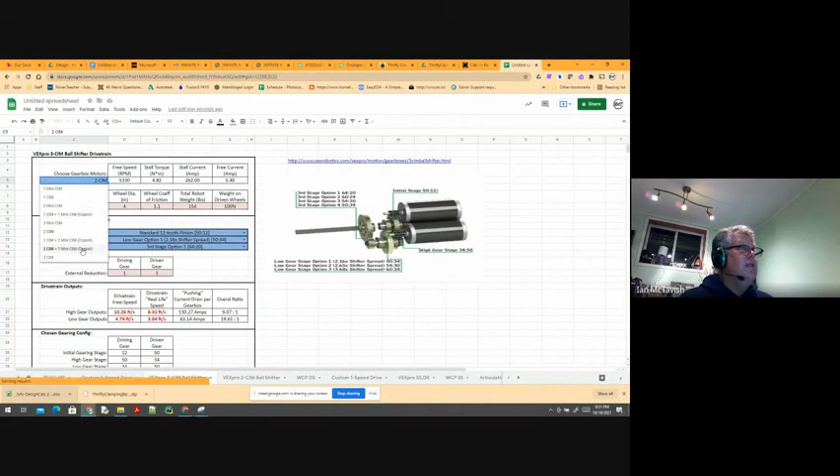So there's a lot of information here, but the idea is that, okay, the VEXpro 3 CIM ball shifter, in here I can select my motor combination. And when I select my motor combination, you can see they've got CIM options. We need to make sure that we always go in and add the Neo motors and the Talon FX. Go for it, Sam.

Again, the one on the team drive has those. I've updated everything, so all the new motors are in the different files. Basically, I want to avoid using CIMs. If I can use a Neo or a Falcon, I would prefer that because they have built-in encoders, they're brushless, they have more torque. We've spent some money to get some, so we have some.

The other thing, the drop down, so under the second black box where it says choose motor pinions - this is outdated, there is now a 10-tooth pinion option as well. So you use the one I've also added to Team Drive for that.

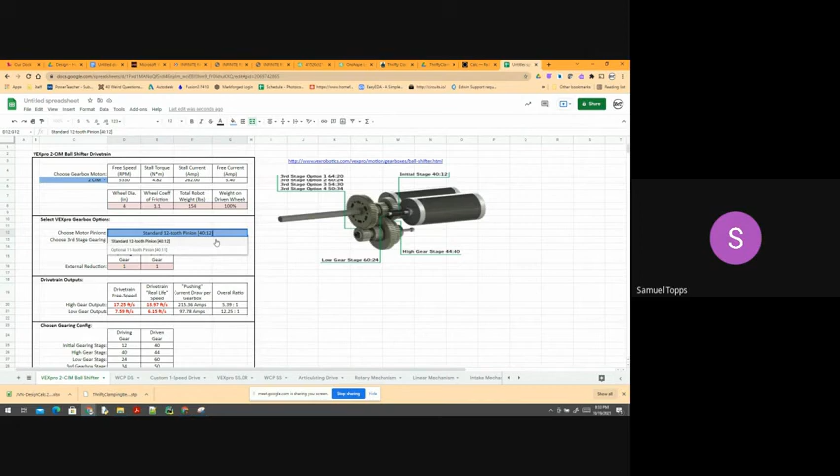Yeah, so basically the idea here is that you pick your motors. Anything in pink you can modify. So if my wheels are 4 inches, great, if they're 6 inches, I can change that. Don't bother changing stuff like the coefficient, and we always use the robot maximum weight as our guideline.

But then you can start picking your gear ratios, and the whole point is that your gear ratio will determine what your speed is. So this particular setup is approximately 20 feet per second.

If you look at Team 254, they have technical binders over the years, and it's really useful to read through those. You can see that for one game they went for this many feet per second, and for another game they went slower - they're very strategic about what they do. So it's good to look at them to understand why you would pick a different speed.

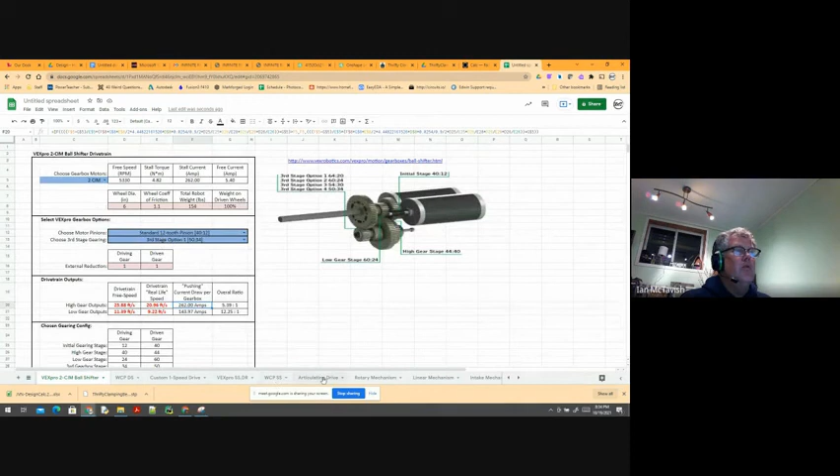You can see your current draw, and basically the current draw gives us a clue on if this is going to work or not. It's really useful to go through and figure out, okay, we're doing a linear mechanism or an intake, and this can tell us how fast it's going to run and whether it's going to stall out. So if it's drawing 15 amps and we have it on a 40 amp circuit, no problem at all. Those are the key things we want to make sure we understand.

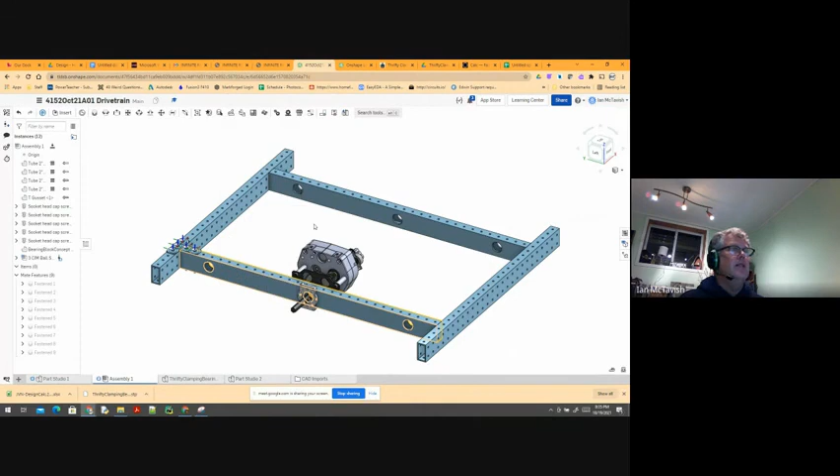Yes, I'm going to edit in context. So I'll right click this and edit in context, new context. What I want to do is add a belt, and there's a feature script for it, of course. There's one called the context-less belt. I'm going to show you. So there's my bearing holes.

So what I'm going to do is set my pulley teeth. We were dealing with 42 teeth pulleys, right? I think that's what we set it for, that's why in my belt calculator I did. So, a couple key things. Actually, before I go into this, let's just create a variable. Call it pulley teeth and set it a number, 42.

The reason we're doing this is when you put it in the variable, if I'm like, what pulleys do I need? I can look in the sketch and see, oh, pulley teeth, okay, I know exactly. Having a variable like that makes it much easier for me when I'm doing my shopping and stuff. So now I've got that context-less. I'm going to make my sketch for my bearing holes, and now for my pulley teeth, I'm just going to use that variable, 42. There's my pulley teeth. Now the pitch, remember, was 5 millimeters.

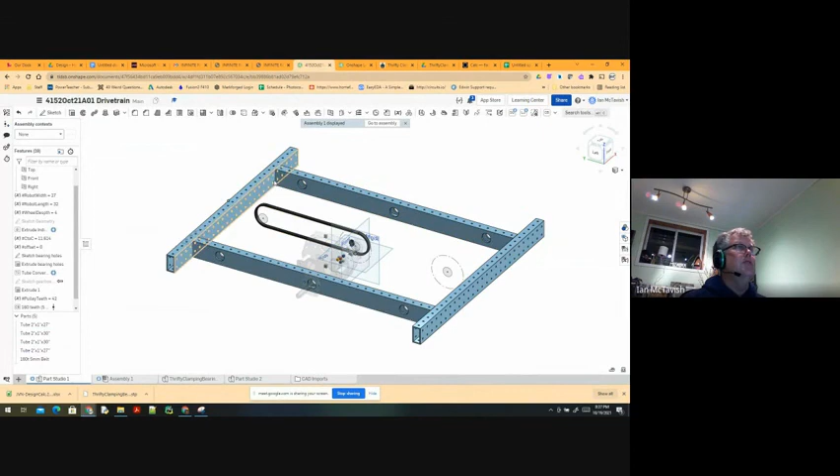And I'm going to select that point and that point. Just like that, we've now added a belt, and you can see that's a 180-tooth belt, which matches the desired belt. The bonus is that when we insert this, I should have all 4 belts in there. And I'm just going to... no, that didn't insert it. Whoops, I'm going to insert that belt.

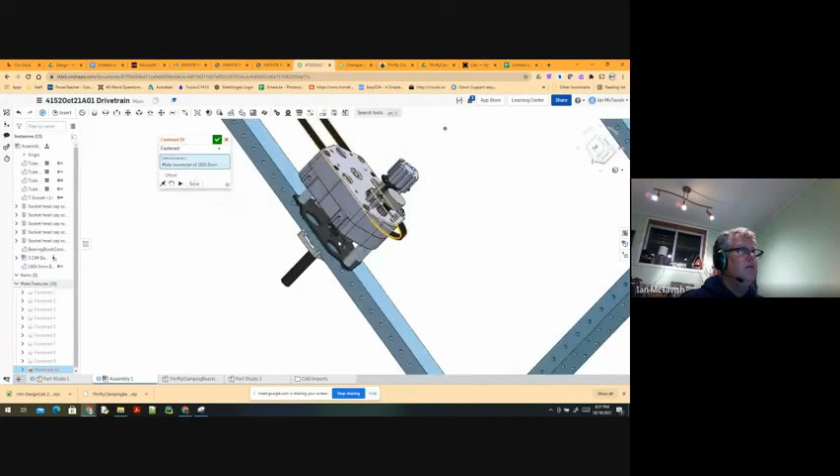So I'm going to use the center of this and set it to the center of that. If you're designing a custom intake, it's really useful to see if everything's going to fit and if the belt's going to rub against anything. But the bonus for me is that now in my bill of materials, I know that I need that size of belt, and I'm not guessing. That's really crucial - I'm not spending time going, oh, how big is this, what's this? The more information I have, the easier it is to get the resources that we need.

So we've got everything. Obviously this drivetrain is not done - there's a few missing pieces with it, but I think we've covered enough stuff to get you going on it. I want to show you one last thing. I'm going to create a new assembly.

If we decide to go with the kit of parts drivetrain, the beauty is that MK-CAD has that. So I can go to MK-CAD and look for the kit of parts chassis, and I can configure it 32, 72. I'm going to add a Falcon, going to generate it, and just like that...

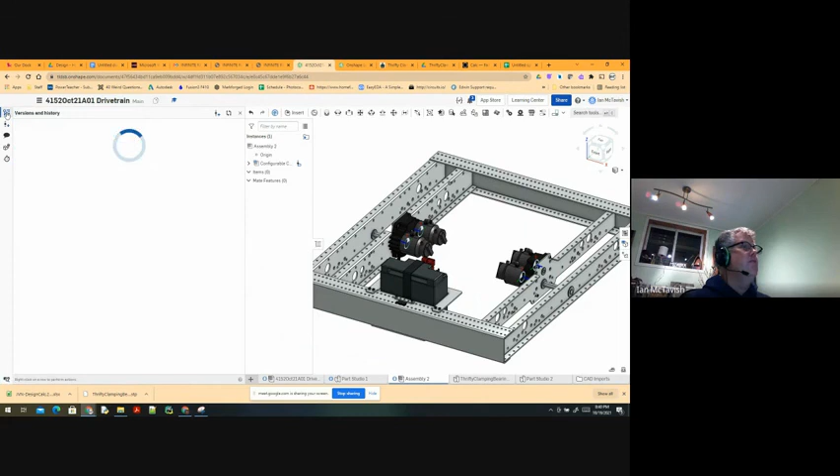I am now going to create a version for this, so I'm going to create version 1. The reason we create a version is now somebody else can come around and screw this up, and no problem, I can restore it. So that's a really useful thing. I've created my version in my main robot - so there's my main robot.

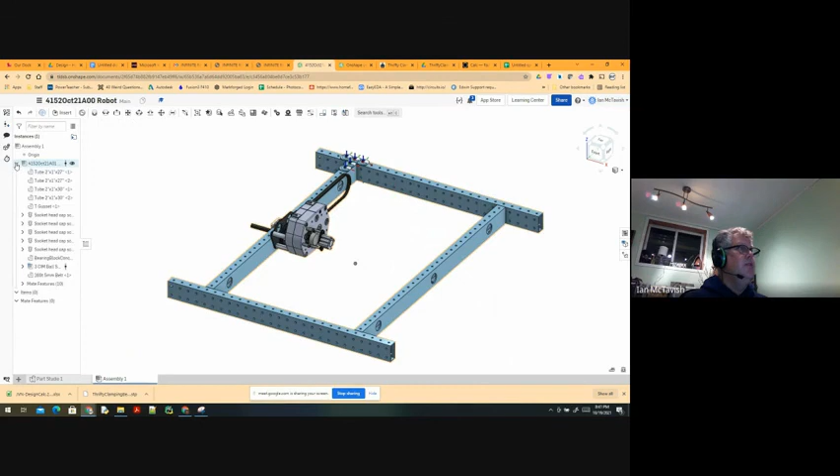I can now open that up. I'm just going to fix that first tube in space so everything's locked in place. So now I've got my main robot, and somebody can go in here and create a sub-assembly and use this as reference geometry so they can figure out where everything's going to fit, so that we can add our different mechanisms.